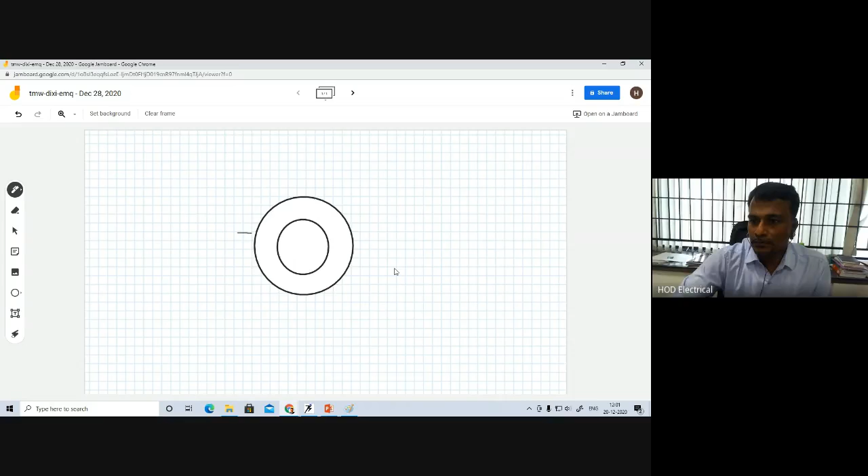Let me explain the toroid and the magnetic flux in the toroid. Assume we have a toroid, and inside the toroid there is a core. The core is like this, and there is a winding placed here. The input electrical voltage we will apply here.

The number of turns in the winding we take as N, and the current flowing through it is I. According to Fleming's right hand rule, with the current in this direction, the magnetic flux path will be like this. This is the path, and here the flux is in the core. The current flowing through the winding is I, the number of turns is N, and the flux is phi c.

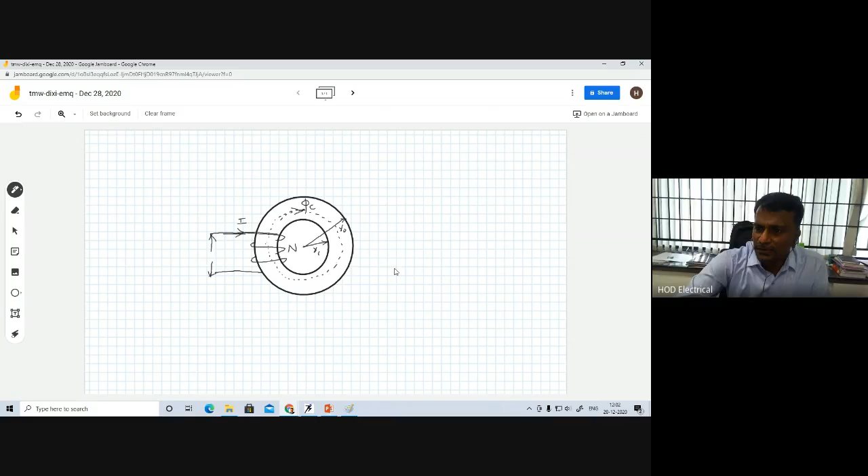Now from this center there is an inner radius Ri and an outer radius R naught. This is the center O. Now the mean radius R equals R naught plus Ri divided by 2.

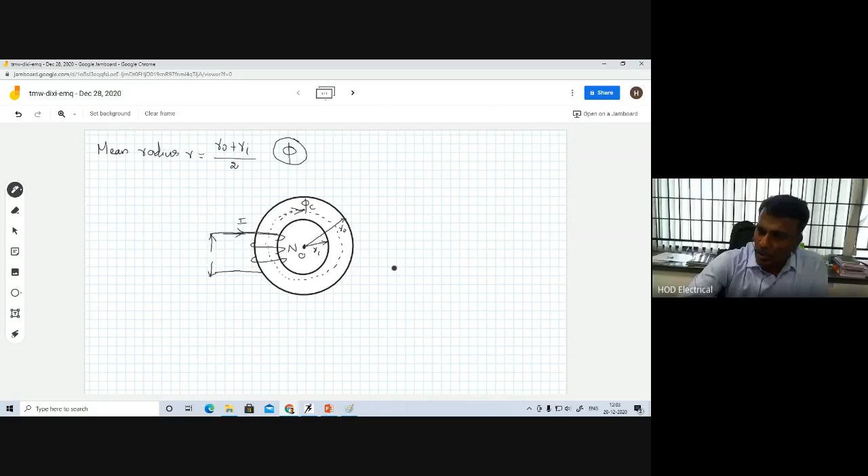Our aim is to find the flux in this toroid. According to Ampere's law, the line integral of magnetic field intensity is the total current enclosed, which we can write as number of turns into the current. So the line integral of Hc dot dl is equal to N into I. The flux will also be flowing through this path.

According to this, the length of the path is 2 pi r, where r is the mean value, R naught plus Ri divided by 2. So we can write magnetic field intensity into 2 pi r is equal to number of turns into the current. So the core magnetic field intensity Hc is N I divided by 2 pi r.

Based on the relation between magnetic flux density and magnetic field intensity, the magnetic flux density of the core is permeability into the magnetic field intensity of the core. Mu is mu naught into mu r. Mu naught is the permeability of air, 4 pi into 10 to the power minus 7 Henry per meter. Mu r is the relative permeability of the core, which we can also write as mu c.

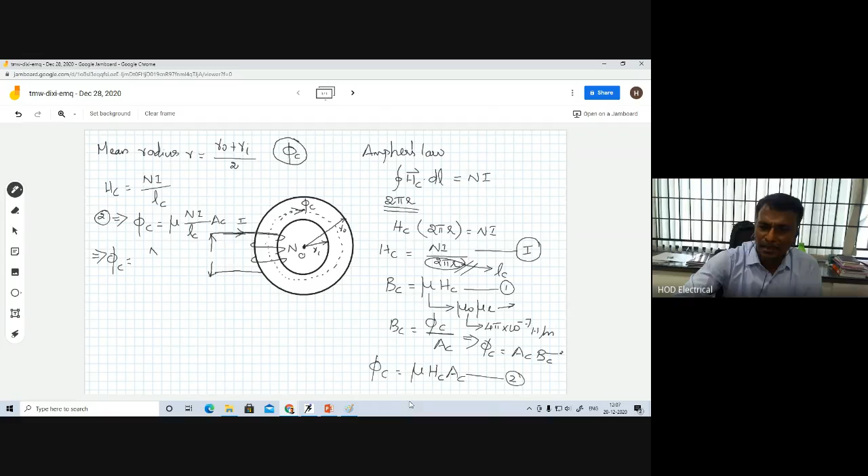The second equation becomes phi c equal to mu N I by Lc into the area of the core. We can rearrange this as phi c is N into I divided by Lc divided by mu into area of the core. We know length of the core divided by mu into area is called reluctance. So phi c is N I divided by the reluctance of the core, that is, magnetomotive force divided by reluctance.

So now we are going to see the equivalency with our electrical circuit. According to Ohm's law, current flowing through the circuit is equal to EMF divided by resistance. We can write voltage divided by resistance. So from this, reluctance will oppose the flow of flux. Similarly, resistance will oppose the flow of current.

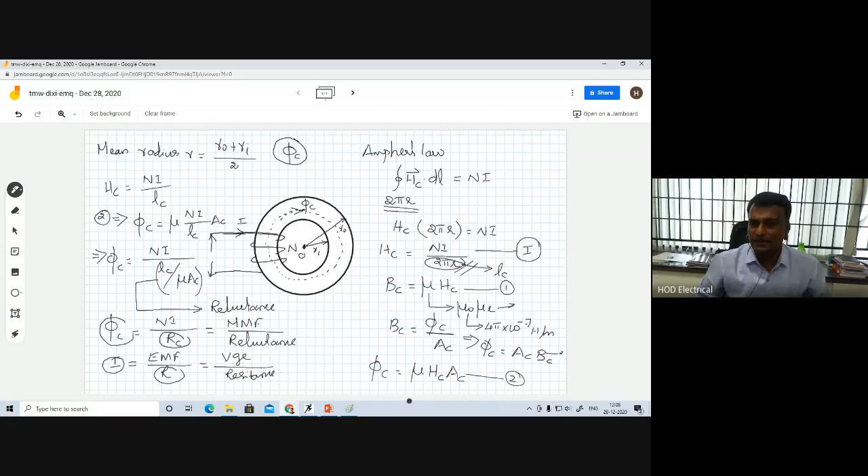Similarly, the equivalent of magnetomotive force is electromotive force, EMF. So with this case, we can conclude that there is an equivalency between electrical circuits and magnetic circuits. Now, let me see the same toroid having one air gap.

Assume this is the toroid. In this toroid, there is an air gap. So now you can connect like this, and this is the toroid. Here I have given the supply. This is the number of turns N, the current which is flowing, and voltage V.

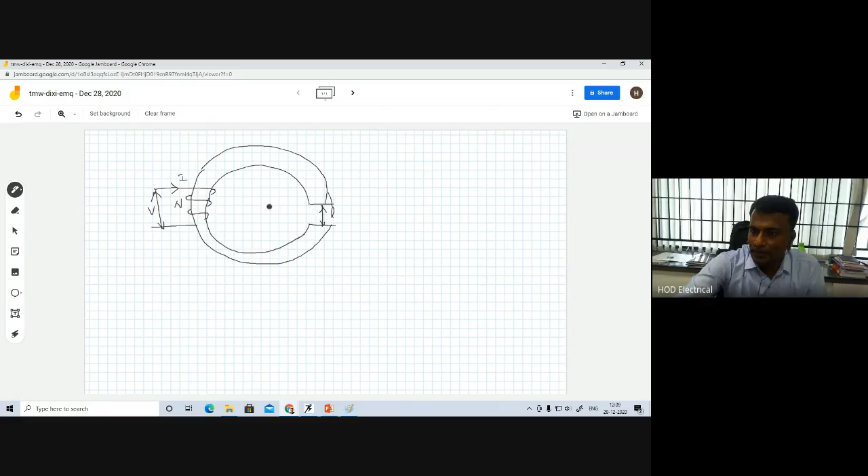Now this air gap length is LG, air gap length. Here the length of the core is LC. LC is nothing but 2 pi into mean radius. So the magnetic flux phi will flow in this direction, magnetic flux phi C. This we have now learned.

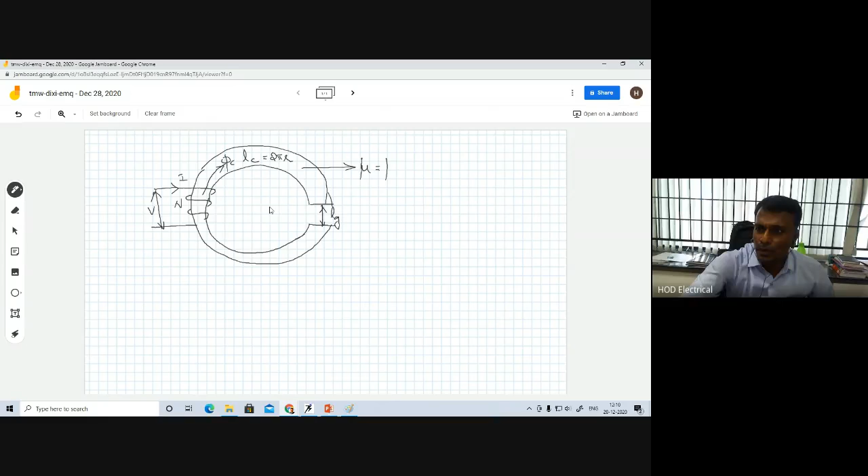So now the core has a permeability of mu equal to mu naught into mu r. At the same time, the air gap has a permeability of mu equal to mu naught, since relative permeability mu r is equal to 1 in the air.

For example, if the relative permeability of the core is infinite, then the reluctance of the core, which we already know is length of the core divided by mu into area of the core, goes to zero. If mu r is infinity, the mu term in the denominator goes to infinity, so the reluctance of the core will be 0.

Otherwise, if the relative permeability of the core is some other value, there is a core reluctance as well. So the same flux will pass through this air gap also.

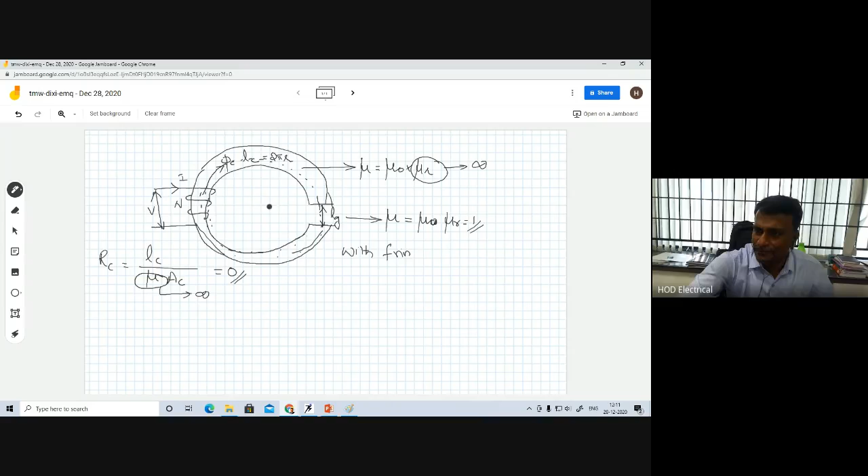So now assume that there are two cases: with fringing effect and without fringing effect. First, we have to consider the case without fringing effect.

In this case without fringing effect, we have to apply Gauss's law. What does Gauss's law state? Gauss's law states that the magnetic flux through a closed surface is equal to 0. So in this closed surface, magnetic flux density in the air as well as magnetic flux density in the core are both the same.

Magnetic flux density in the air and magnetic flux density in the magnetic core; that means we can write the surface integral of B dot n into ds is equal to 0. So how will it be 0? Assume the magnetic flux density in the core is BC and the area of the core is AC, plus magnetic flux density in the air gap times the area of the air gap, is equal to 0.

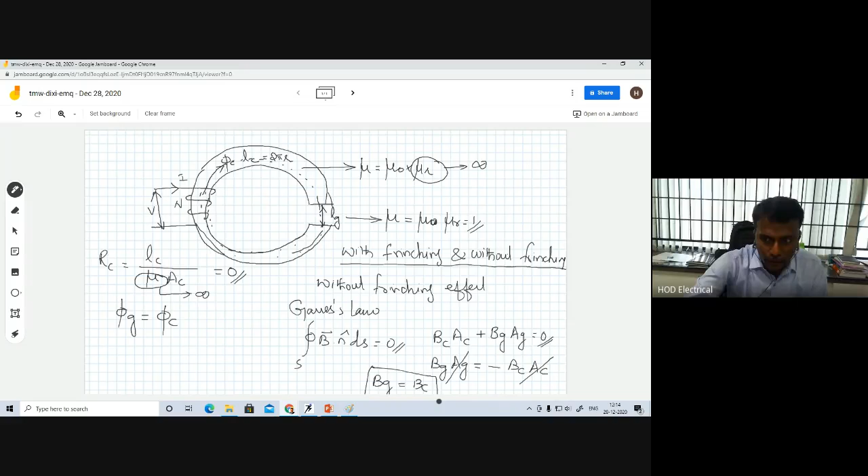Accordingly, we can assume that the magnetic flux density in the air gap is equal to the magnetic flux density in the core. Without fringing, according to Gauss's law, the total sum of flux is equal to 0. Accordingly, BG is equal to BC.

How is BG equal to BC? If the areas are the same, the fluxes are also the same. So phi G is equal to phi C. That means the same flux will be coming through this air gap as well. So if phi G is equal to phi C, we can write this equation by using Ampere's circuital law.

Ampere's law, what is that? Line integral of Hc into length of the core plus Hg, air gap magnetic field intensity, into length of the air gap is equal to number of turns into the current flowing through this. So accordingly, Hc into Lc plus Hg into Lg equal to N into I.

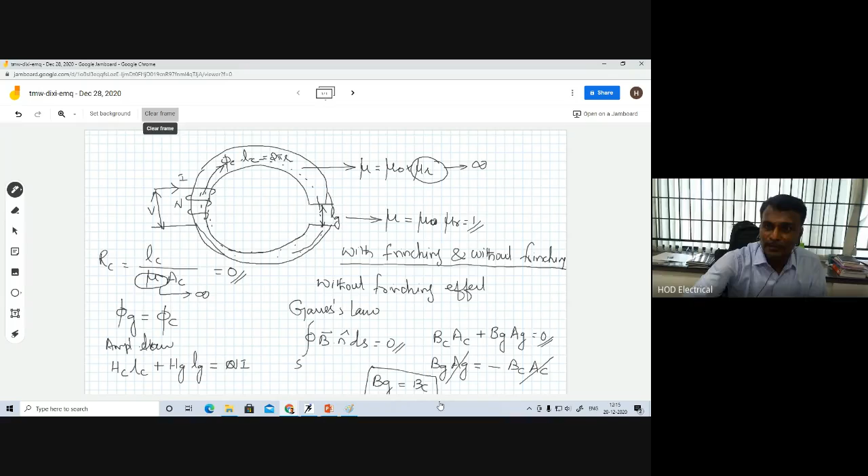Then if we use the same calculation what we have already learned, that is Hc into the length of the core plus Hg into the length of the air gap is equal to N into I. Then by using the relation Bc is equal to mu into Hc, we can write the first equation: Bc divided by mu into Lc plus air gap flux density Bg divided by mu into length of the air gap is equal to N into I.

Already we know magnetic flux density B is nothing but flux divided by area of the core, and magnetic flux density of the air gap is nothing but flux in the air gap divided by area of the air gap. So if we substitute here, the first equation becomes phi C Lc divided by mu into Ac plus phi G Lg divided by mu into area of the air gap equal to N into I.

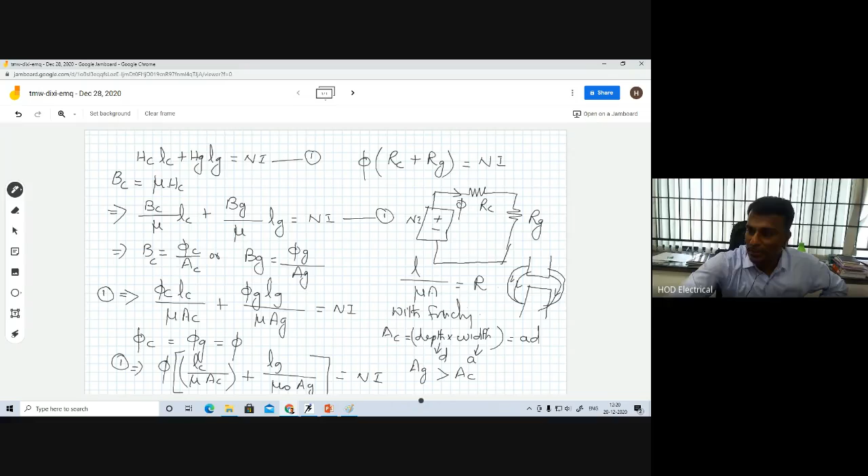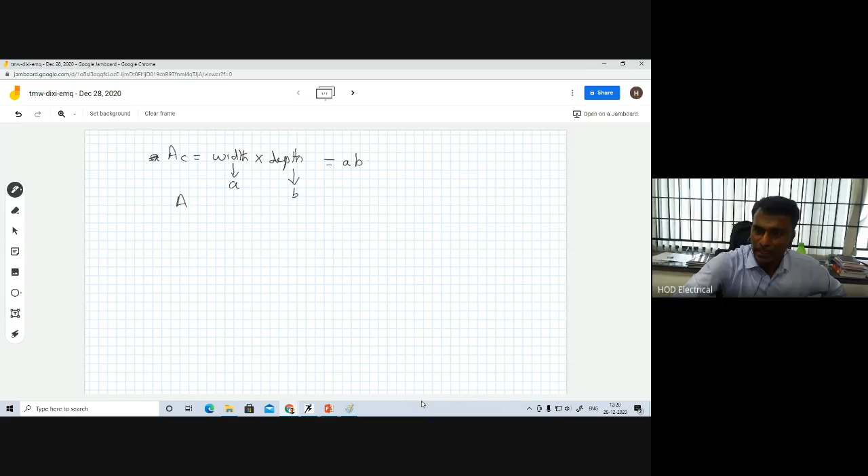So as I already told you, the area of the core is nothing but width into depth. Take width as a and depth as b, so we can write a into b. With the fringing effect, area of the air gap is greater than area of the core, so area of the air gap is width plus length of the air gap into depth plus length of the air gap, or otherwise 1.1 times. So this is the normal case.

Since with the fringing effect, area of the air gap is greater than area of the core, we assume area of the air gap is a plus Lg into b plus Lg, that is equal to 1.1 times the area of the core.

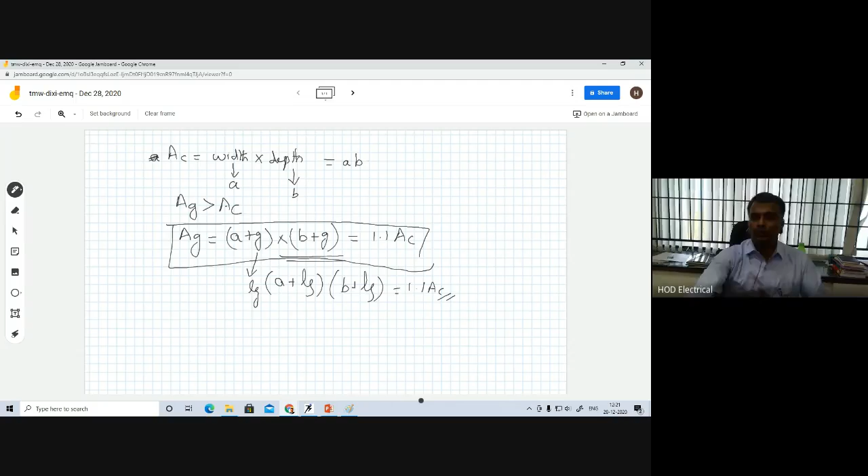So this is the detailed explanation about magnetomotive force and magnetic effect in the toroid with the air gap, without air gap, with the fringing effect and without fringing effect. This will help us to know the basic knowledge behind modeling of electrical machines. I hope it is very much interesting and understandable.